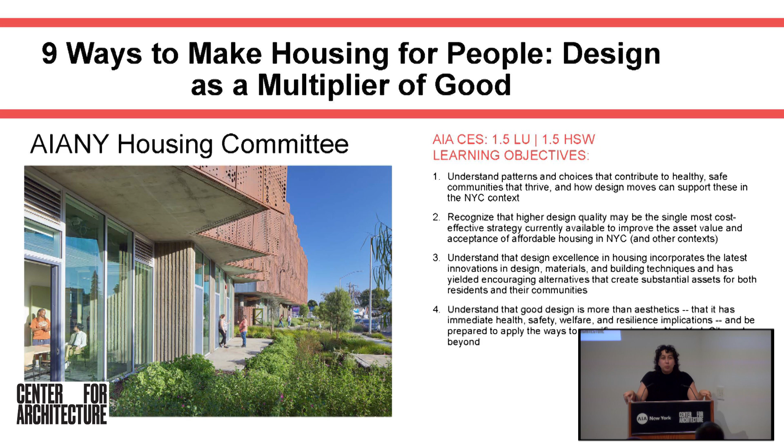All right, wonderful. And how about developers of affordable housing or housing in general, or working in the finance space? All right, awesome, great, great. Anyone else just working for the city more broadly? Awesome. All right, and lastly, just raise your hand if you consider yourself someone committed to housing. All right, so anyway, we're glad that you're here.

And now that we have a better sense of who you are, we can get started. We're joined tonight by our moderator, again, Katie Swenson. Katie is a nationally recognized design leader, researcher, writer, and educator. As principal at Mass Design Group, she focuses on how design promotes economic and social equity, environmental sustainability, and healthy communities. Some of you might recognize her from her time with Enterprise Community Partners, where she led design and sustainability initiatives, including the Rose Architectural Fellowship Program. She's the author of two books, Design with Love and also In Bohemia. She's an AIA Public Architecture Award recipient and serves on the board of the Van Alen Institute. She teaches at Columbia University and the Parsons School of Design. That's all. Okay, so without further ado, let's bring Katie up to the stage.

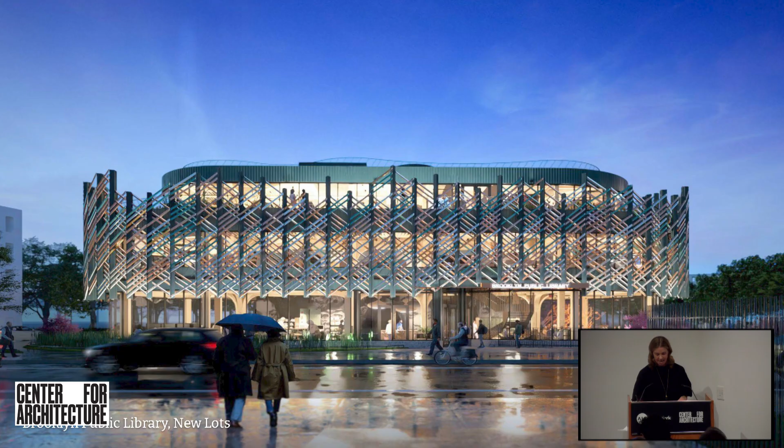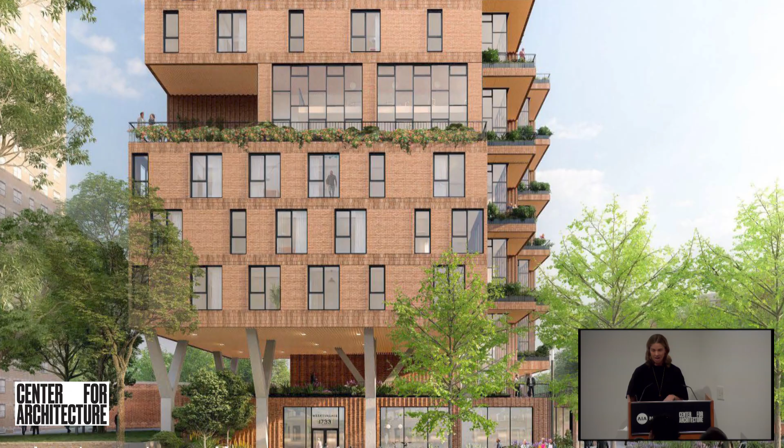We are here in New York, so I have a couple colleagues here with me, many of whom are working on this stunning new project for the Brooklyn Public Library in New Lots. We're doing it in partnership with Marble Fairbanks Architects and just an incredible crew. So I want to put out the word, we're here, we're absolutely so delighted. We're also doing a beautiful new housing development project, an HPD NYCHA project with Canva out in Kingsborough in Crown Heights in Brooklyn, and we're partnering with Marvel Architects on this project as well.

So housing is something that I am passionate about. I know you all are passionate about it, and we're absolutely passionate about it at Mass. We have about maybe a little over 1,000 units of housing right now in our own pipeline, and I would say we're trying to learn from the best. This is our goal, we're all trying to be here learning from the best. So we have a number of projects, many in Boston, but not only, around the country.

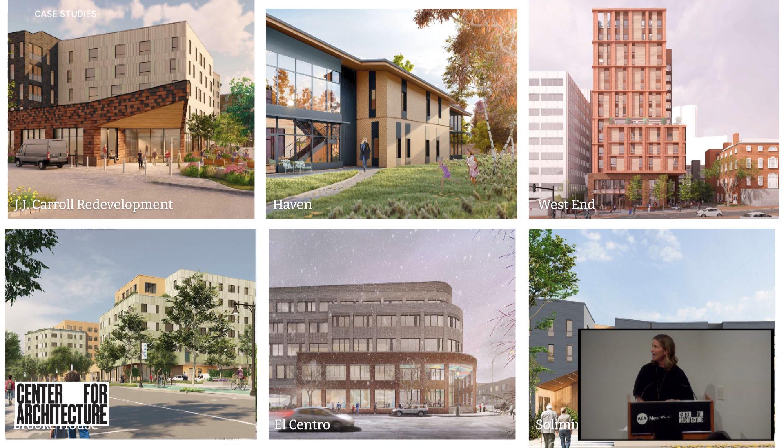So tonight is really about this question around housing, and I did want to start by setting this stage a little bit. I think it took me a long time working in the industry—when you're a houser and you're in the housing industry, everything looks like a nail that must be a hammer, however you say that. And I was actually kind of chagrined to learn from Jim Stockard at the Graduate School of Design that if you take all the housing in the United States and look at anything that is subsidized for low-income people at all—and that doesn't just mean LIHTC projects or housing credit projects, that means any type of housing—the number is under 5%. So we really have our work cut out for us.

I think we all know that design quality is an essential part of solving some of these larger policy issues, but we have a lot of work to do. I looked at the stats from last year, and they're looking even worse, so unfortunately we're not making gains as a group. Of all housing units, only 4.3% were built to be affordable for people with low incomes.

I think the last slide mentioned home ownership. We can talk all night about the subsidies for home ownership, but we won't—that's not what we're here for. And then I also had to ask the question, what would it be like to have enough? I think the answer is somewhere around maybe 30% of all housing should be subsidized for even the very lowest income people. Now, that's not talking about the missing middle and teachers and firemen and all this stuff, but I just want to start by raising our larger aspirations just a bit.

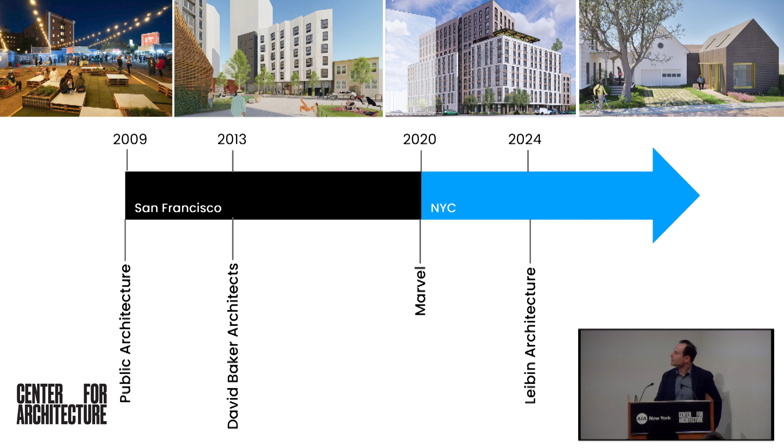And so when I came to New York and started practicing here, one of the things that struck me as really different than California was the density here. The number of units per development is a lot higher, and the projects, at least that I was working on, tended to look more like the one on the right, these concrete high-rise buildings, whereas in California, most of the work I was working on was stick-built, wood-framed over podium, concrete podium, the 5-over-1 mid-rise type multifamily housing development that's actually much more common in the rest of the country.

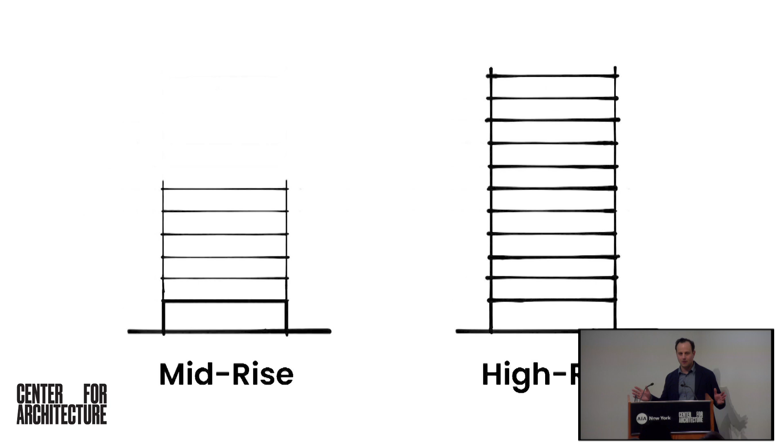But I think this could actually be flipping in some ways. In a lot of places, including San Francisco, there's a lot of upzoning going on, and there's more and more high-rise development happening. Meanwhile, in New York, with 485-x, which is a tax incentive that market rate developers get if they put affordable housing in their buildings, there's now a prevailing wage requirement for buildings over 99 units. So there's a potential that we won't see as many of the bigger buildings over that size moving forward.

And with City of Yes, there's a real focus on missing middle housing and sort of low and mid-rise mixed-use development in lower density parts of the city. So it could be that in the coming years we'll see more of that kind of mid-rise, slightly smaller scale development here in New York as well.

Some other things that struck me as really different in New York coming from California, the biggest one was as-of-right zoning. Almost all development here does not need to go through any sort of design review or community process. It was kind of the opposite, especially in San Francisco, where there was a lot more community process on the projects I worked on than here in New York, for better or worse. The timeline for getting a project entitled and permitted could take 3 years in California, and that was not uncommon. Compared to New York, most projects don't have to go through the ULURP process, and the permitting takes less than a year. It's just a lot faster here.

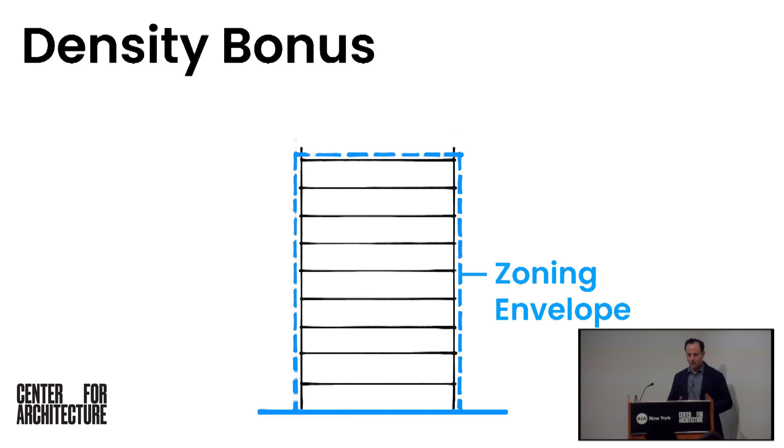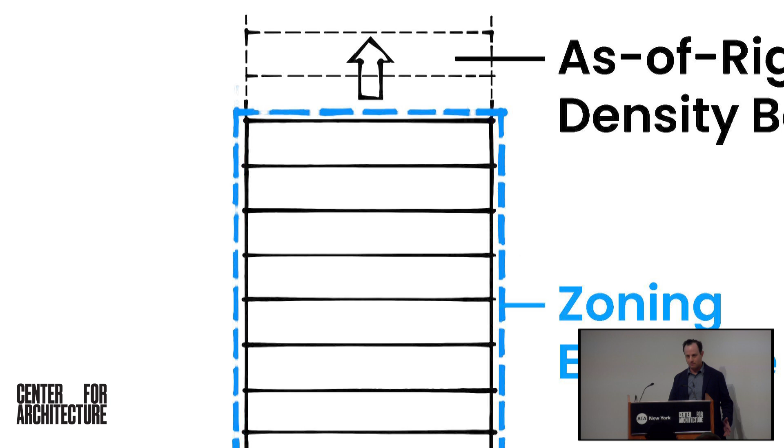Density bonus. In a lot of cities, including now New York with the City of Yes, that includes the universal affordability preference. If you put in a percentage of affordable housing, in the past you could build as of right within the zoning envelope, and now you can go 2 or 3 stories higher than that as of right, with no additional review. So you're able to build more densely with no additional process or review.

The elimination or reduction of parking minimums, we're seeing in cities all over the country, including here in New York with the City of Yes.

Incentivizing office to residential conversions. This is one of the first ones in New York that Gensler did down in South Street Seaport, the Pearl House.

And then housing on faith lands. There's a lot of underutilized space on church lands, for example, like parking lots, that are now being rezoned to allow for affordable housing.

And lastly, transit-oriented upzoning, so allowing more density in proximity to transit lines.

And the result of all this is that we're building more housing than ever in the US. 420,000 new rental units in 2022 was the highest number in half a century. But that's good, but we still have a big deficit, and there's a lot more work that needs to happen.

So the bottom line is that we're streamlining density, and that can be scary. It's not easy to get it right. There was a New York Times article recently talking about how we're building more housing than ever, but it kind of has this bland, generic quality that people don't like.

But density is wonderful, and that's why so many of us live in places like New York, and it's also the answer to many of the social and environmental challenges we're facing now. So I'm really glad to be here tonight with David Baker and Amanda to talk about the 9 ways, which I think addresses this problem of how we do density well, head on. Thank you.

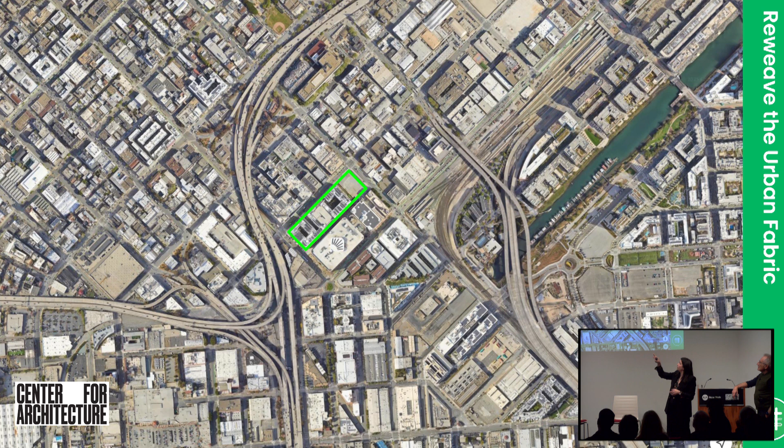This is in the South of Market neighborhood in San Francisco. The blocks are long—though I realize yours are even longer. This is an 825 by 225 foot block, and it's not super traversable, especially in this neighborhood. You can see it's cut off by some freeways near this site, and especially when the wind's blowing, these are pretty tough blocks to walk.

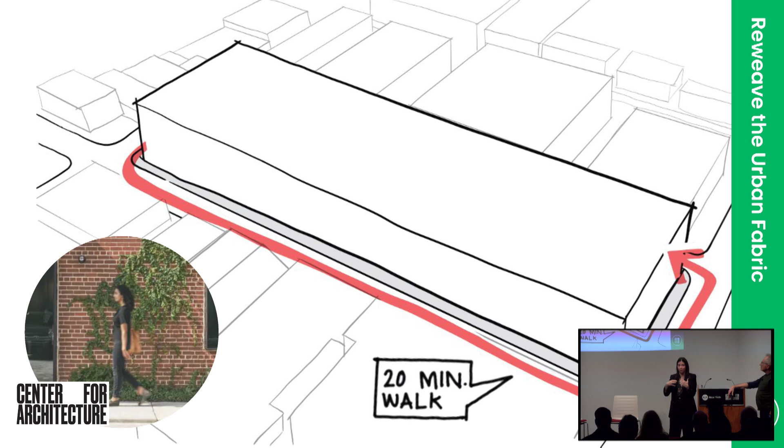That's one of the things we always think about, especially at the acre and large urban scales—how does it feel when people walk, how long would it take to get from this place to that place. That old-school idea of putting walking radiuses on a site. When you break your building up and provide pathways through, it really adds a lot of quality and connectivity to the pedestrian experience.

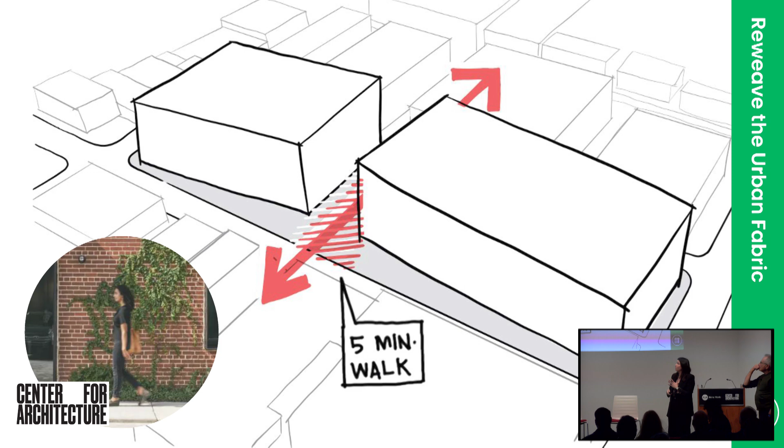With this block, we controlled about three-quarters of the building you see here. This parcel was for future affordable housing that's actually built now. We also had a funny requirement to provide parking not only for the housing but for the adjacent commercial space, so the parking requirement was higher than usual—so we wrapped and lined that parking garage with an active use.

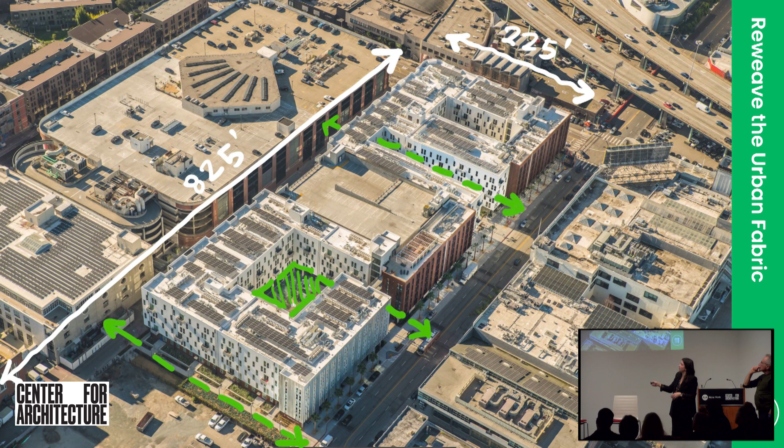Then we made a cut around 200 feet there—that's a pedestrian, publicly accessible paseo. This is actually a publicly accessible open space during daylight, a sheltered, lush courtyard. And there's a third pedestrian cut-through that starts to break that mega block down into bite-sized chunks: that's the building, that's the first pedestrian passage, that's the entry into the courtyard, and that's the other public paseo. It really helps break down that street wall.

Another hack is that when you break up your buildings, you can create redundancy in circulation. We like to use these bridges so we don't have to do extra stairs—you can have your cake and eat it too, breaking up the mass but also leveraging the circulation. David will probably talk more about circulation too.

But this is this public passageway that we put the infrastructure in with power and shade so that hopefully they can have markets and things like that. And then to the left and right are these commercial flex spaces, so they're not necessarily just for living, but you could also do commercial uses as well.

And then we really saved our money, and I can't believe we got these redwood trees day one, for it really made this courtyard a real escape from what is kind of the grittier, larger scale South of Market neighborhood. Really quiet, you can hear the birds and the leaves rustling. And then this is the residential, quiet pedestrian passage, and then that future affordable housing goes to the right, so it's a mirror between those things.

Okay, so the second thing we're talking about, when you talk about spending money, one of the things that happens as an architect is you know that if you have something that's easily identifiable as expensive, that becomes a target for the so-called value engineering, one of my favorite terms. But if you do something that's embedded in the design, it's very hard to cut it out.

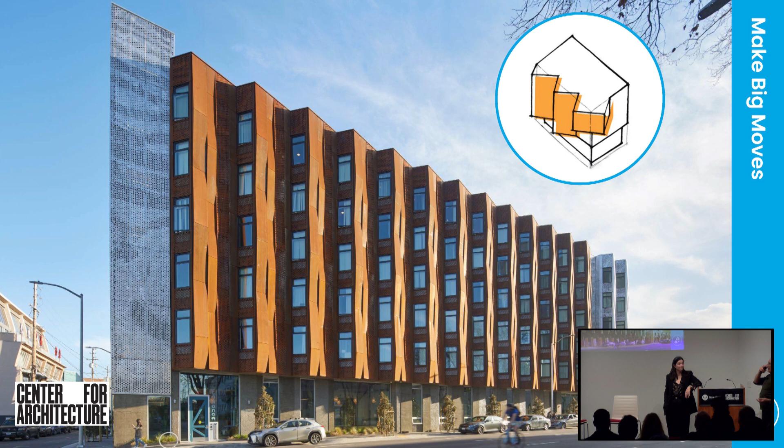This is make big moves, and it really just means that you do something other than a shoebox. And we found over the years that if you have a reason for it, that's even better.

So here, this is formerly homeless housing. And actually what happens, these windows all look to the view of San Francisco. And if we put a window on the other side of the bay, they would look at the jail. And we thought, this is probably not the view that a lot of these folks really want, because a lot of them have been in the jail. And it's just not a feng shui wonderful view.

So we said, do a sawtooth. And actually the planning requirement here was to have windows on both sides of bays. But we were able, because California has been busy demolishing planning requirements, to go, nice idea, but I don't think so.

Which has its good side and its bad side, because then when nonprofit developers go, well, we don't want to put any nice retail frontage, they can just tell the city, no, we're not going to do it. So it's interesting what's happening. We probably have less planning requirements now in San Francisco than a lot of places, just about anywhere. We have almost none when the building is affordable.

So yeah, I know, it's interesting. It's because it got so bad, we produced so little housing. So anyway, this is another thing.

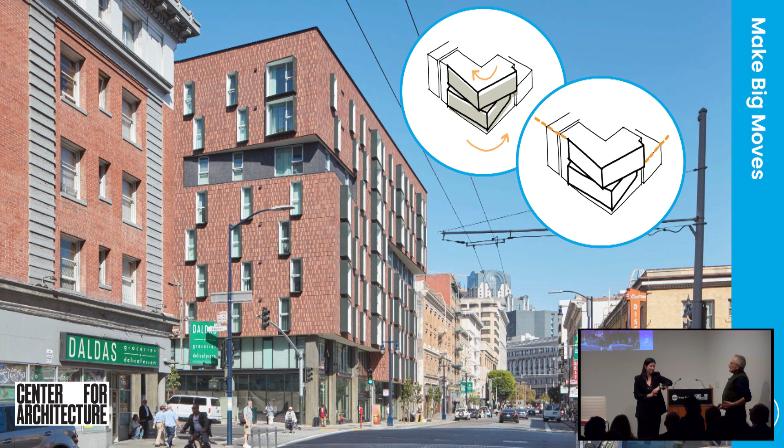It was serendipity or luck. And then here again, I'll make big moves. Actually on this one, we had put so many units in here that we were really having a hard time meeting our minimum square footages. So we did this swell, and instead of doing the standard San Francisco bay, we sort of bowed it out, and it became a fun process.

And in terms of actually doing interesting buildings that don't cost more, we found that if you get the contractor involved with an interesting idea and tell them we need your help figuring it out, the masons are like, can this thin brick make a curve? They get really excited about it, and they don't charge you for it, essentially. They don't go, that's a stupid idea.

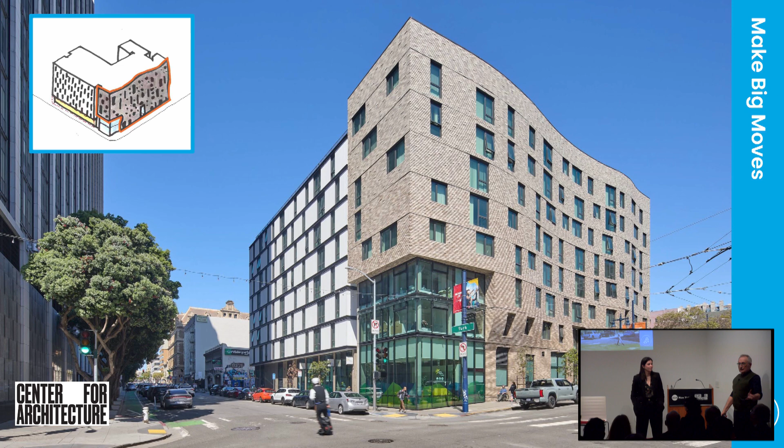And then often we pair what David just talked about with this idea that we only have a little money to work with - how are we going to use it? It's like spice in a dish. We didn't need that whole building to have that swell everywhere, it actually would have diluted the idea. So how can you make a little go a long way? And where can we put that where it makes the most impact and is the most strategic?

So on this particular project, our whole scope was there in blue. Most of this building is either cement plaster or Hardie. But this one moment - this is that Mission Bay neighborhood that David mentioned, this is now a built park - we knew that this corner would be kind of this new gateway into Mission Bay and would also have a lot of eyes on it with the park.

And so this was our moment. We tried to behave ourselves and keep it simple everywhere else, but our moment was there on that corner. So we brought the parapet height up just a little bit. And then, of course, that's where we put our effort into detailing and the quote premium material. And you had to do a lot of convincing for that material, I remember - people don't love rusty things as much as us architects.

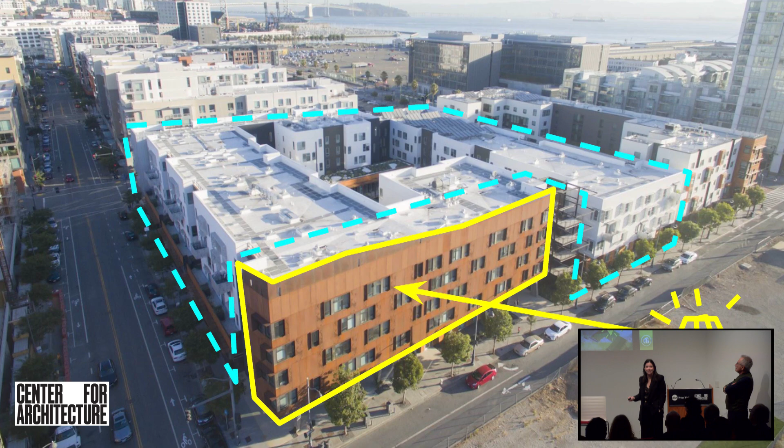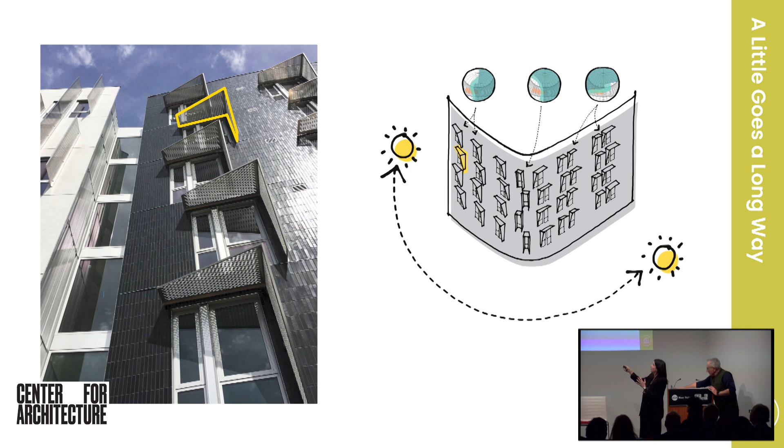But these are those two projects that David showed with the bay. So there's that massing move, but then again, it's where we also put our detailing effort and our material effort. These are four different black glazes that actually, when you're there, really change and reflect as you walk around the building. And then it's also where we got a little fancy with our sunshades, and we plugged it into Ecotect and analyzed the heat gain versus material usage. So that's what outputted this kind of funky geometry, because the shades change as they change orientation. The corner really was where we spent a lot of the effort.

And then, not only does it happen on the exterior like we've been talking about, but also just where people are - the front door, the main amenity spaces, the things people are going to touch. Because again, most of the project will be less expensive materials, but where can we put those warm things?

All right, so we have a commercial break. Yeah, and Brad, I thought we would go to you a little bit.

I guess I think historically in New York, so much of the housing felt like kind of a backdrop. Maybe you guys agree with me, maybe you don't. But we saw housing as doing the yeoman's work of housing the people and lining the streets, and then we put a little more design intention into churches and museums and iconic institutions. So I'm curious about this idea of housing as a sense of a very respectable backdrop, a good one and a beautiful one. Here you certainly see it, versus this kind of design delight that we're seeing in housing.

So that's for me? Well, okay. I think the ground floor is the way that most people experience not just housing but most buildings, and there's a real opportunity there. A lot of it is everything from ceiling heights to transparency, and designing the ground floor to support active uses. Those are challenging problems that, if you do it right, can have a really big impact on the way people experience the streetscape and just creating that wonderful density that we're all after.

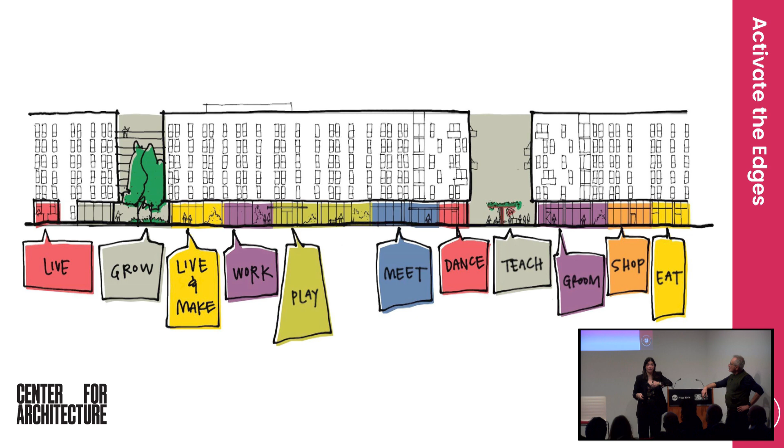And often, if you ask how tall is the building where your favorite cafe is, even architects won't remember if it's in a high-rise or a one-story building. It's because you focus on that immediate—it's like it comes from the savannah, you're looking out for tigers, for the prey. And it's really tough, especially when you guys are doing hundreds of units at a time—it's so impressive, think about the complexity you're coordinating and the schedules. But it's such a discipline to come back down to this detail of how do we make sure the ground floor is going to be successful, particularly successful over economic cycles, where sometimes retail is thriving and that makes sense for that neighborhood.

But often when you're building, you don't know. So trying to set up the framework on the ground floor so that it could work and flex. Again, this is stuff that's not rocket science. We leveraged our structural bay to create these storefront segments, remembering to put your awnings and light the signs. It's really kind of minding your P's and Q's of the ground floor.

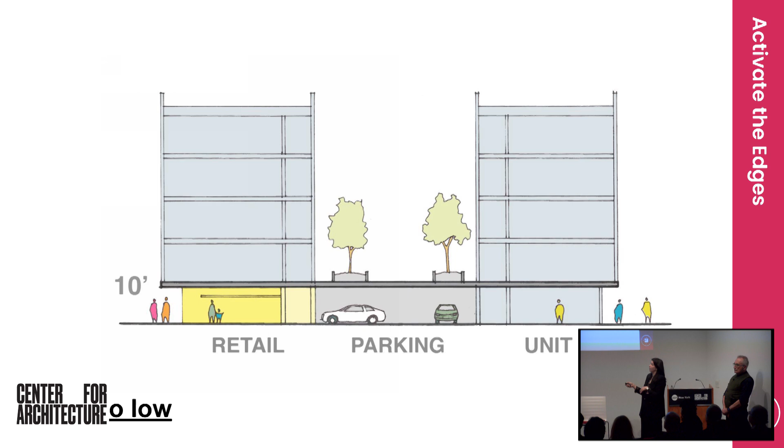Ceiling height matters a lot. 10-foot in new construction is really tough to make really wonderful. Like Brad was mentioning, a lot of our work is wood frame over podium. So we've got this question about where to set this datum. We often have the parking embedded in the middle with an active residential or commercial liner. 10 foot is really too low. 12, I think you could make it work. You could then start to get some steps for that unit, but your retail still feels pretty squashy.

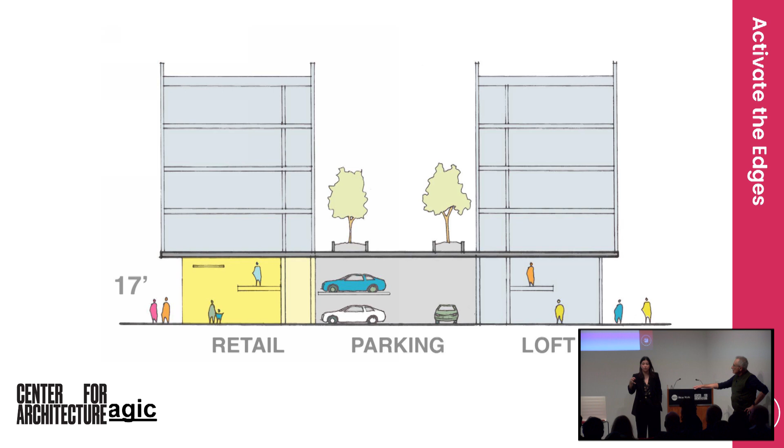17 or 18 is really great because you can start to get some loft spaces in your commercial uses. Parking stackers is something we lean on a lot in San Francisco, so you can start to get that second level of stacker. And then at the ground floor, you have more flexibility residential-wise. You can kind of make that residential unit spill out to the street and add a loft, so it could be a flex unit.

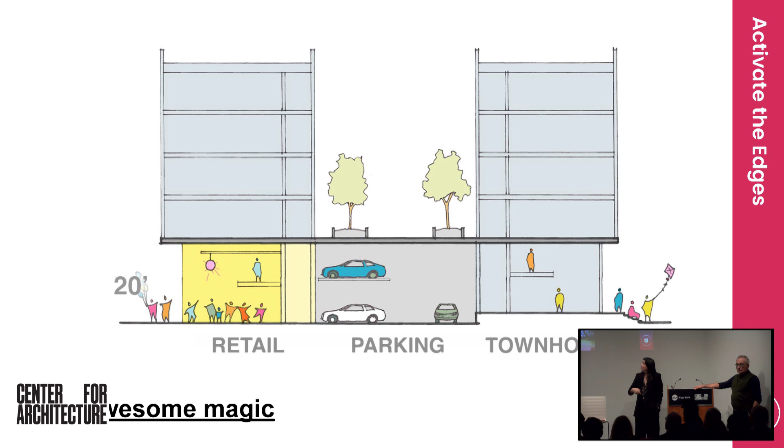Often when we're in neighborhoods where it's just hard to imagine what would be good on the first floor, we advocate for something even higher to give the most flexibility. Not only so that you could have nice little disco parties in your retail space, but you could have a full second story. If you actually go to 21 feet, you can get a triple height stacker, which sometimes we are also leveraging. And on the residential side, you could have a townhouse, but that also has a stoop.

That was kind of the vertical case, but now thinking horizontally, you often need to pay attention to what is the sidewalk that we've inherited here. Is it enough that the tenants in the ground floor can thrive and do the things we want it to do? In this neighborhood, we realized we needed to set back so that there's space for those things like awnings and seating. We call this the quirk zone.

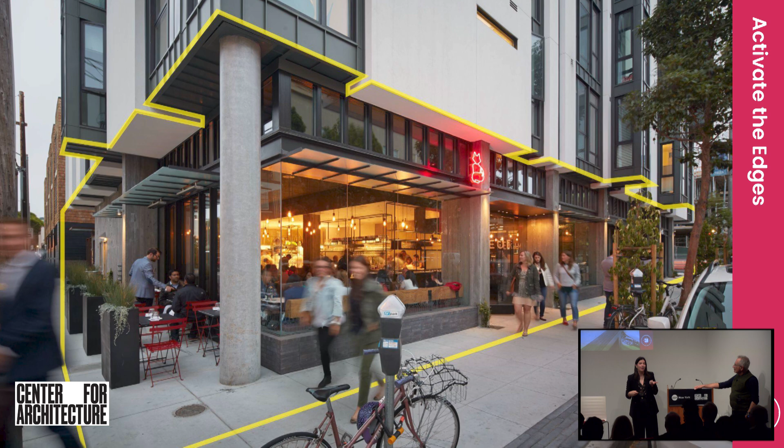I still think we need a better name for it, but the idea was to make room for quirkiness, so that tenants and people could make their mark. Because again, we think about walking along a block — I was just shopping today, y'all, and the joy is that every 10 feet there's something new to look at. So we really want to make space for that quirkiness and sidewalk seating.

And then residential as well, so that you have more of that buffer from the urban realm. When you get that residential buffer and stoops, it's a place again for people to make their mark and put their pink flamingos, which I think has been really humbling, especially as a housing architect. Ultimately our buildings are about the people that live in them, and so making these spaces for them to make it their own.

This project, I remember we fretted — it's over 600 linear feet. It was a pretty rough street, folks were camping there beforehand, and it was just really hard to imagine how anybody would want to rent a space on that ground floor. So this is where we really tested an extreme case for flexibility, where we pulled all the structure out to the exterior, and we added a few more bays so that they could be leased in these micro, affordable-by-design sizes, so that a mom and pop jeweler could then, maybe they're successful, grow into the second, more spaces, or lease it all.

Actually what ended up happening was the California College of the Arts leased the entire facade, and then the sidewalk just became the corridor. So it's become this really active, vibrant space. And then flex units, or live-work, however you want to call them, are another tool of ours when we're just not really sure what's going to work.

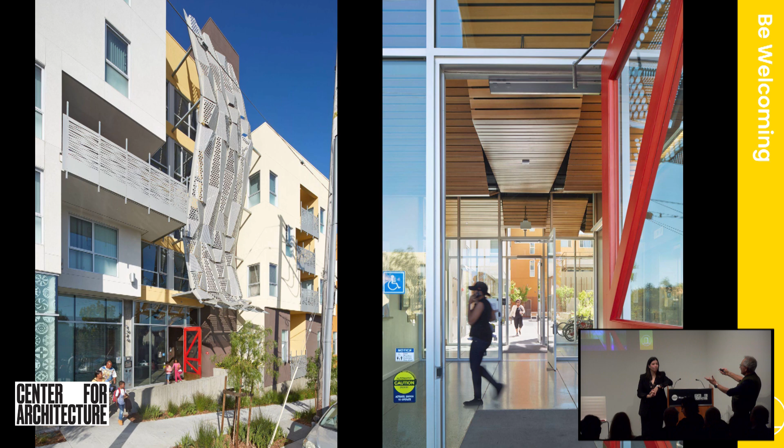But then also at the front door, in this case, there's a really nice courtyard, and you're looking through that courtyard, so you have a sense of welcoming and daylight. It isn't like a dark den.

This is another door entry, and we'll do a little procession here. One of the things we've thought about a lot, and there's a lot of nuance to these things, is the idea of a feng shui compliant entry, which just means that instead of going right into the building, you go into a decompression zone. In this case, it's this wonderful garden designed by David Fletcher, Fletcher Studio. So you go in, there's a ramp up, and there's beautiful landscaping. We have the luxury bike parking there. This is not an affordable project, by the way.

And then one of the things we've done over the years is we work a lot with various artisans. There's a guy named Paco Prieto, and this was back in '92. Oh my God, which was, I think, just a couple years ago.

You know how architects draw that line pointing to the hinges? He asked what that line was, and I said, don't worry about it, it just shows which side the hinge is on. Why we do it isn't really justified, but it's there. Then he asked if he could put mullions on that angle, and I said it's not going to be much harder. He said if you do a door like this without those braces, it's much harder because you have 4 moment joints. From a fabricator's viewpoint, it's much more difficult to build the square than to do this K shape.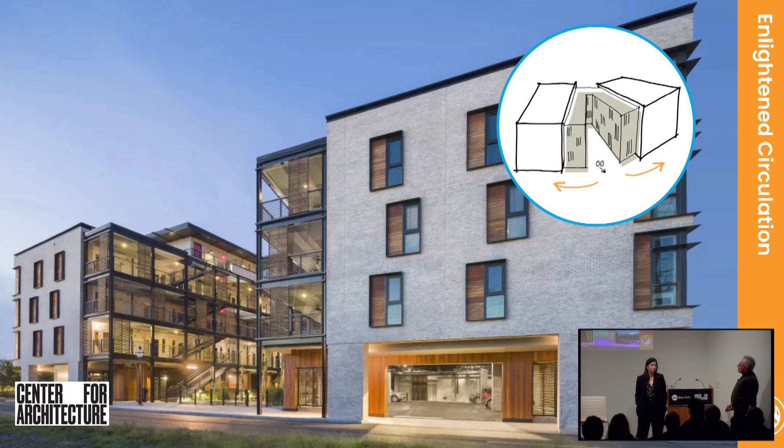We're going to be in the American Pavilion of the Biennale, and the theme is porches. So we had done this building in Charleston, and the thing about Charleston is they have a tradition of the single house, which is a multi-story porch on one side of the building where all the circulation is.

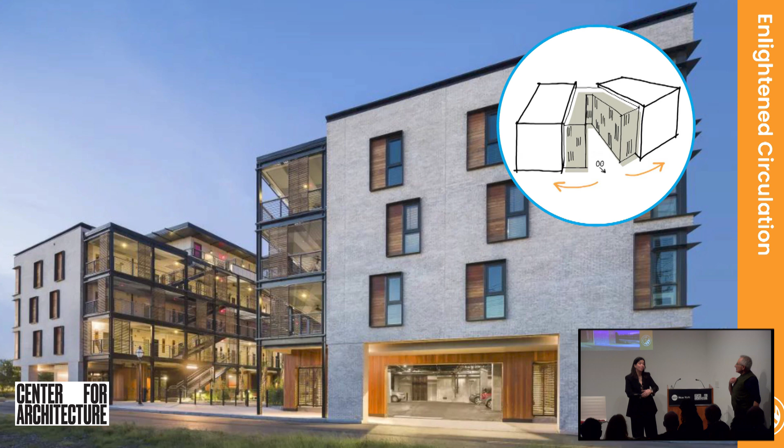We had an interesting story in regulation where we proposed this. We had a double-loaded building with about 50 units. They said you could do it this way, but you'd have to do all these things that we couldn't do in California because they wouldn't meet the various codes for affordable housing. The planning director said, 'I've been the planning director for 27 years, and Mayor Riley's been mayor for 28, and if we like it, you can do it.'

That was pretty nice. Also, our local architect partner was nervous because everybody that doesn't live here comes to Charleston and wants to riff on this single house. He called it the 'Yankee architect' thing.

He's always kept us honest. You Yankee architects all come out, we want to do a single house. Okay, but anyway, this is interesting.

So our developer, quite wonderful, bought rocking chairs for all the senior project. This is kind of your architect's picture—we did a rendering, it looked like this, with people sitting in the nice rocking chairs, they all match.

But this is what it's turned into. And I think we visited, and Amanda burst into tears. I did, actually, of joy, because people were just having such a great time using these porches.

What is that width, David? What's the depth of the porch? It's about 12 feet. Maybe I think it's 15. 15? I think it's 15. Wow. So, and also, it really helps when the fire marshal is related to the mayor.

Well, I don't think the fire marshal would appreciate all the furniture, because this is the exit corridor, with these French doors opening out into it. But it all meets code.

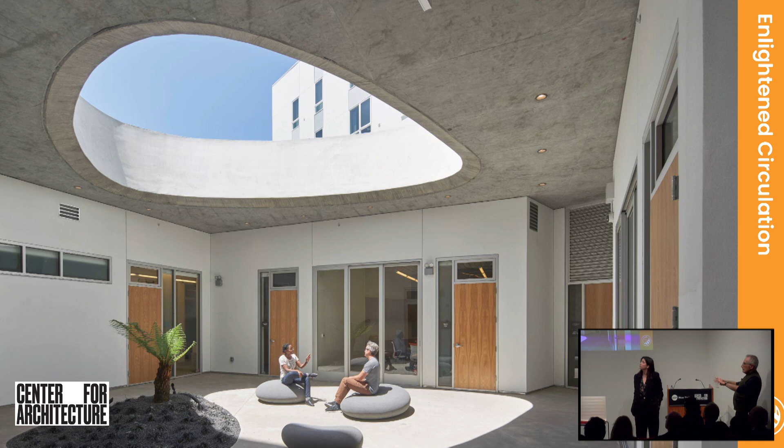And there's actually got a great picture—there's a recording studio in here. It's still very operational, looks wonderful, and they produce records for the community.

And then from above, you can see a landscape architect, Andrea Cochran, and the contractor—that was an example of talking a contractor into something he really wanted to do and knew it was going to be really hard, but was really proud of it, so he didn't go like, it's a billion dollars. He went, we'll figure it out, we'll work together.

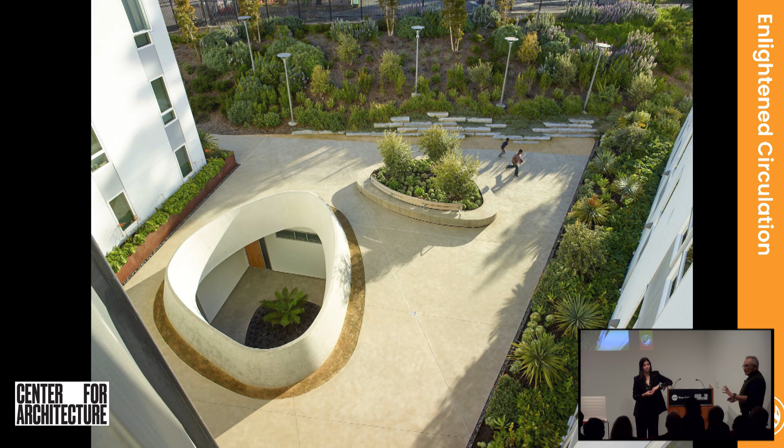Okay, so common spaces—I think the street is your first common space, right? That's the first one. How are you all—do you have a role in even designing some of the programs? Sounds like you're also trying to create the most flexibility so anything can happen. How are you thinking about these kinds of spaces?

It's interesting—I feel like between our market rate projects and the affordable projects, they behave a little differently. Whereas the market rate projects, amenities and common spaces tend to be about being the best or being the most distinguished, really about a leasing tour.

Whereas when we're designing affordable projects, it really is how will this work for the residents? How do we group these things so they'll be functional, and building management can manage them well, and the residents feel like it's theirs to use. I think they're both important, but in our affordable buildings, they become this real lifeblood that's not necessarily on the street—sometimes they are, but often they're paired with one of the courtyards in the building.

One of the important things is having amenities that bring people together. Like, people might really want a washer dryer in their unit. In affordable housing, that'll add several thousand dollars to the unit, and then maybe big insurance claims later on when the washer overflows. Whereas if you do a really nice laundry room with soft seating near it, with access to a courtyard, and Wi-Fi in the lobby, people will go there. A lot of people with lower incomes aren't going to have Wi-Fi at home, since that's another charge. So people hang out and talk to each other, and you get a great sense of community.

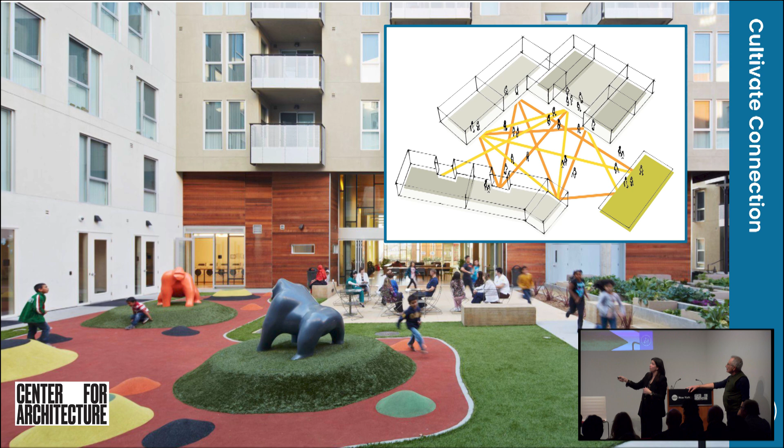So here, this is the community room that spills out. We've got a kind of multi-age play area here. Laundry, there's a kind of messy kids art space here, and then raised vegetables. So you can tend your vegetable while your kid gets off some energy, or you can look at the vegetables while you're doing your laundry, and it just makes living in the building easier.

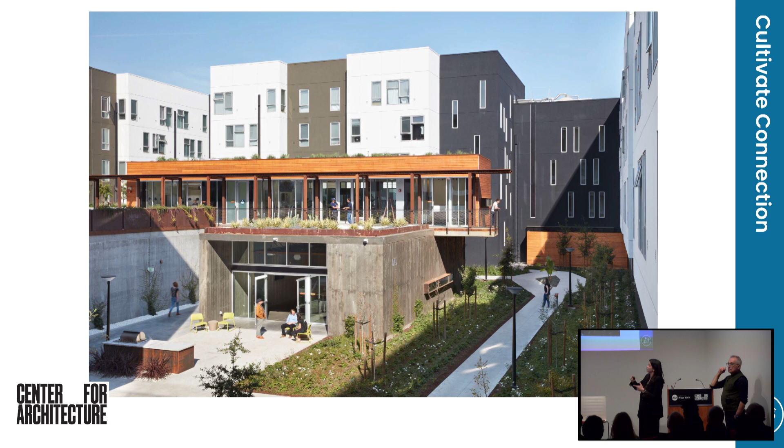And here we did this kind of in section. This is that open lobby project David was talking about, but the big community room is here that spills out into this patio with the grill area, but then these are these kind of smaller scale amenities like laundry, lounge, gym, etc. And then for our book, we did this little sketch that tries to imagine.

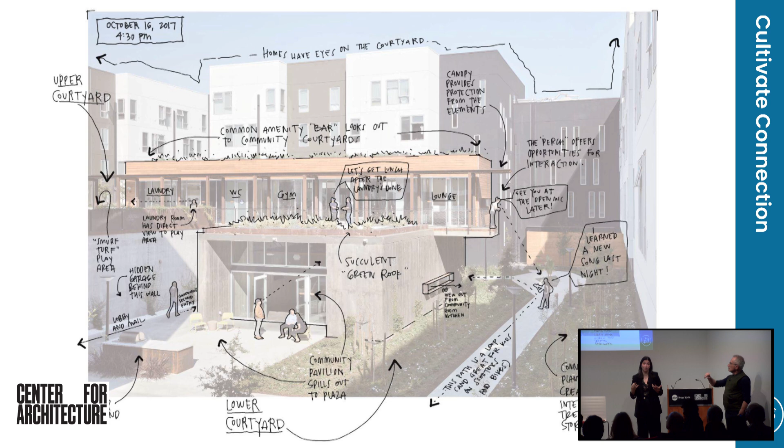Hopefully this is what it fosters, that you get to kind of run into your neighbors more. Also, just this sense of safety too, because there's just visibility, and kids tend to really do loops on their scooter here. And then this is up top.

David calls this the Smurf turf. When we went back and looked at this recently, they'd put a tiny little soccer goal here. So again, you're doing your laundry and your kids are out there kicking the soccer ball while you're folding clothes.

That qualifies as a tot lot. Oh, right, per tax credit requirements.

Yeah, exactly. And then art is really important in our projects as well. For a long time we were trying to figure this out, because these buildings are pretty good sized. And I think at one point we went out and tried to buy original art and put it in the building, and it was really sad, because there's this huge area and there's a couple little framed pieces, you know, because art's pretty expensive. But it's really an important thing, to bring that other dimension of humanity and the making, what people are.

Because modern buildings are so isolating, I think, and there's not curves. I mean, our community group that wanted the curve, that's a very real desire, because there's so little that shows the work of the hand.

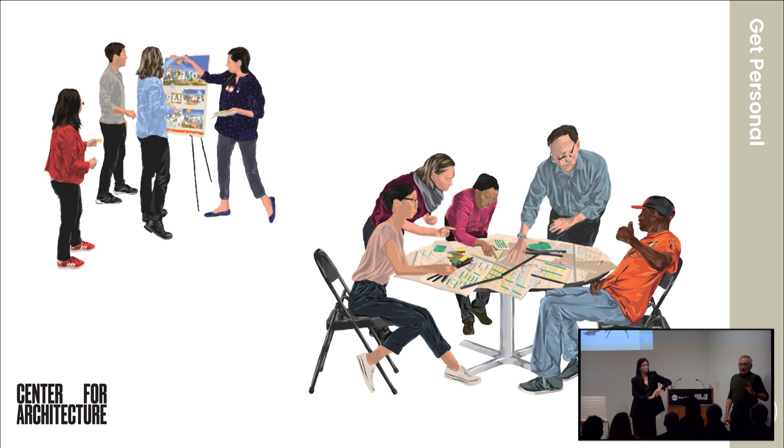But anyway, so what does it mean to get personal? And that can mean, I think, the community process is really important, and it's important in a number of ways. You get really great ideas from people who are on the ground, who actually live there. Ideally, we would go and camp out on the site for a week over several seasons, and we'd really understand it, but we have never done that, and I think it would be really hard to do. But so listening to people is really great.

In this case, this is another where people wanted a curve really a lot, and in modern housing, the building really wants to be a shoebox. We're going to talk a little bit about how a lot of the construction magic that's going to save money, we hope, doesn't actually get better. Those things make things boxier. When they do what they want to do, a volumetric modular building is a big volume that's rectangular.

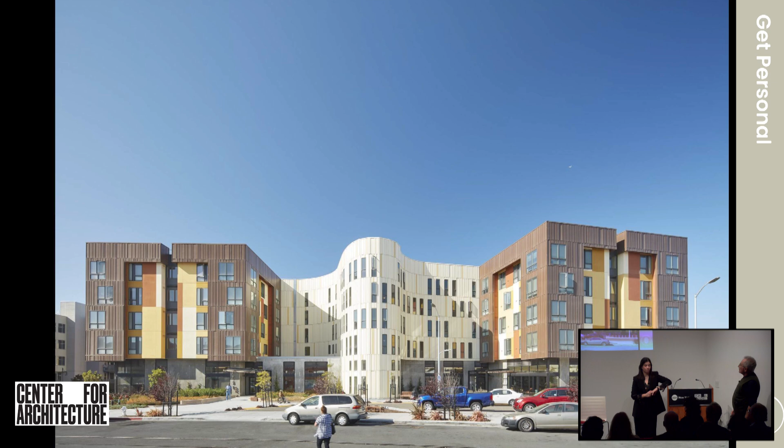So in this case, the circulation, vertical circulation, and the laundry rooms are actually in that pod in the middle. And in terms of getting personal, there's urban agriculture on the roof - these were plots that individuals had, and those windows are the windows of the laundry room. So people go up there and do their laundry and take care of their vegetables or flowers.

Stoops are super great in terms of being personal. It gives you that Jane Jacobs kind of thing where you're both private but public and not in danger, so you can interact with people.

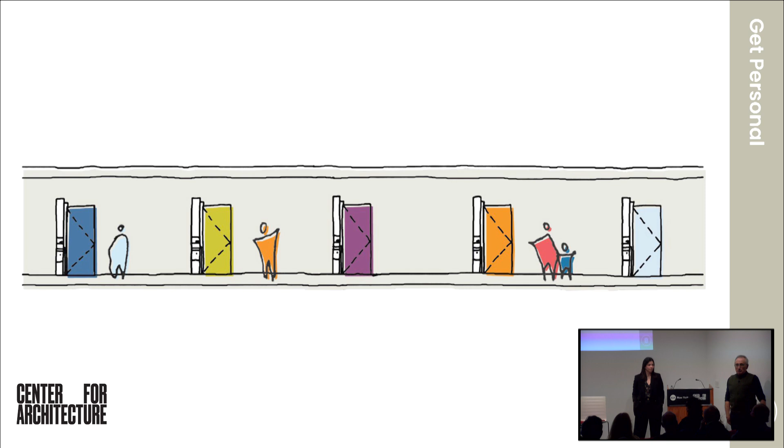These things again are not rocket science. At some point we were painting the doors on different floors all one color, and we thought, unless you go to other floors, you don't know there's other colors. So what if we just pick 5 really nice colors and people get their special door. London has these incredibly boring background buildings, and because there's no sunlight, they paint the doors these amazing vibrant blues and greens and British racing green.

We started doing these doorbells - sometimes they have lights, but we started making them so you could put stuff on them and personalize your entry. The contractors kept charging so much money, they'd look at it and say that's going to be like $2,000 each. So we actually build these in-house now for far less, and say these are $300 and they're really nice, and then they say, okay, we can afford that.